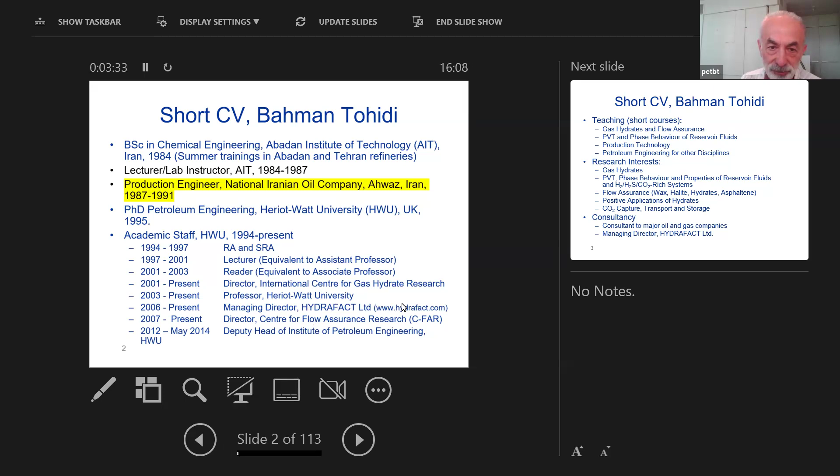And then I formed HYDRAFACT Limited in 2006. The area that I work in is gas hydrate, flow assurance, PVT and phase behavior, production technology, petroleum engineering for other disciplines, gas hydrate, PVT, flow assurance, positive application.

So that's my thing that I work on.

And can you recognize me when I was a production engineer? That's me, that's me, let's see. Okay, that's me working for Schlumberger - no, not for Iran, for the oil industry in Iran. And Schlumberger was giving us some services.

Here, I can cover a lot of area, but it really depends what you want, you know. Some area that I know is necessary, some area that you know is necessary. So I very much hope that we work together to make a very useful course.

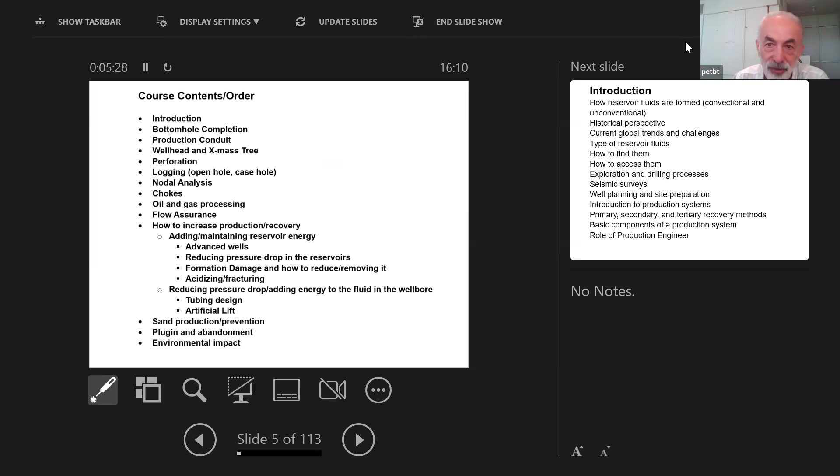For the parents, in introduction, I will cover how reservoir fluids are formed, where the oil industry started, current trends and challenges, type of reservoir fluid - when we say gas, we say wet gas, dry gas, gas condensate, oil, volatile oil - and how we find them.

And then how we get access to them, and then drilling processes. Because drilling is a very expensive process, so we need to have a good chance of achieving the oil or gas.

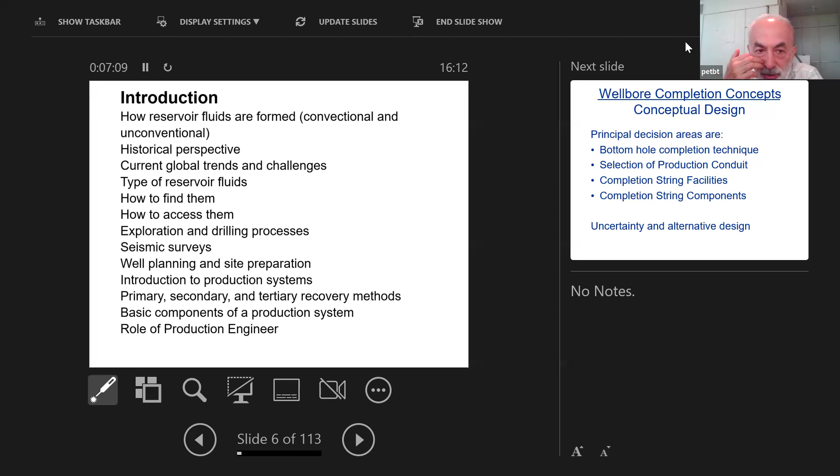Seismic survey, well planning and site preparation, and then production system - when we call it primary, secondary, and tertiary - and then basic components of a production system, and what is the role of a production engineer? What we expect from a production engineer.

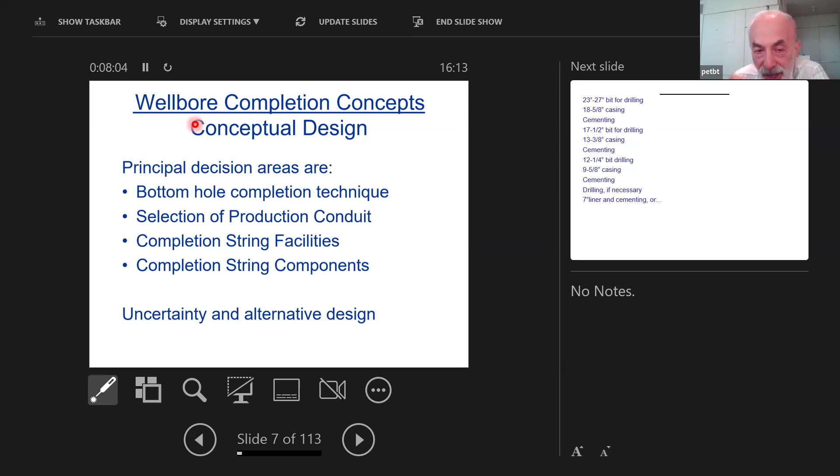Something that recently became very popular is unconventional reservoirs - what are they? And then the well completion concept: when you drill the well, you need to decide how to complete the bottom hole, how you bring it to surface, which component you want to have, which facility you need to have, and which component you use to achieve that purpose.

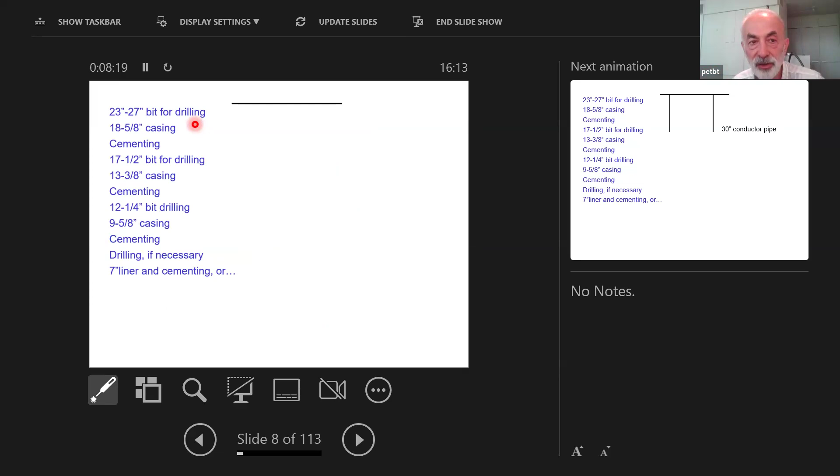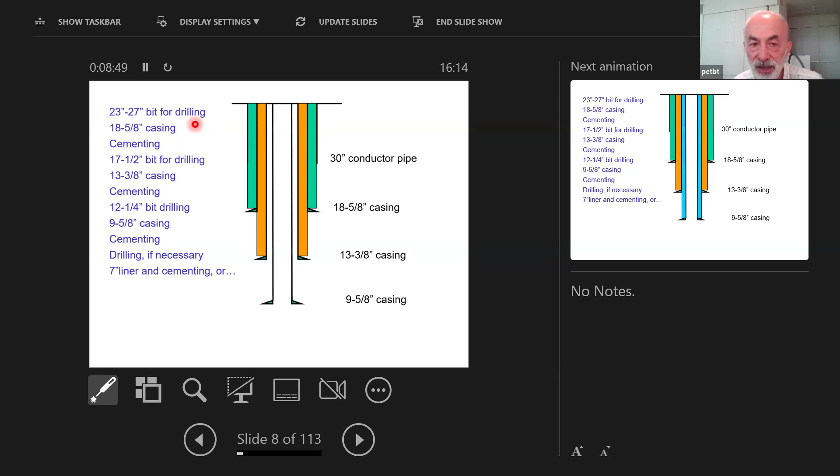Once you find a good chance of drilling and finding a reservoir, you need to drill. In drilling, you have a conductor pipe, then you do an 18-5/8 casing, cemented - this is general, typical - then 13-3/8, then casing, and then 9-5/8 casing, and then cemented. And then most of the time we have a 7-inch liner. Obviously, different countries and the depths of the reservoir, they can be different.

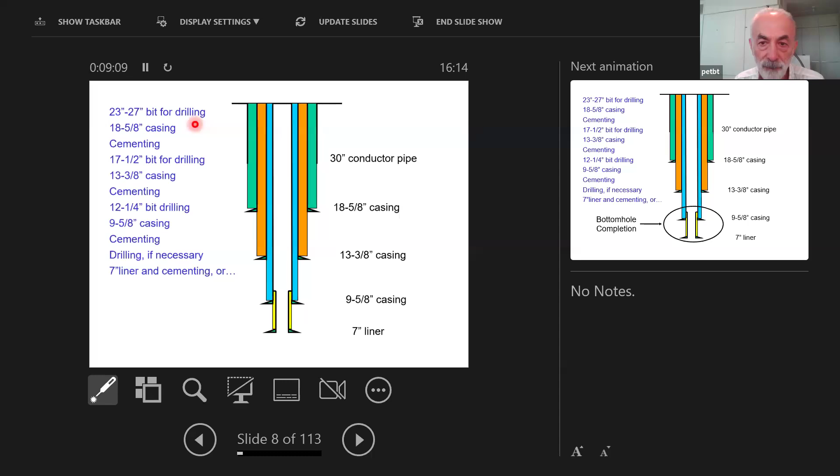What we call bottom hole completion is what is at the bottom here - bottom hole completion. And that can normally be open hole, pre-slotted casing, but more conventional is cemented and perforated. And there are different versions of this - this can be horizontal, can be multilateral. Here you can have expandable screen, different techniques.

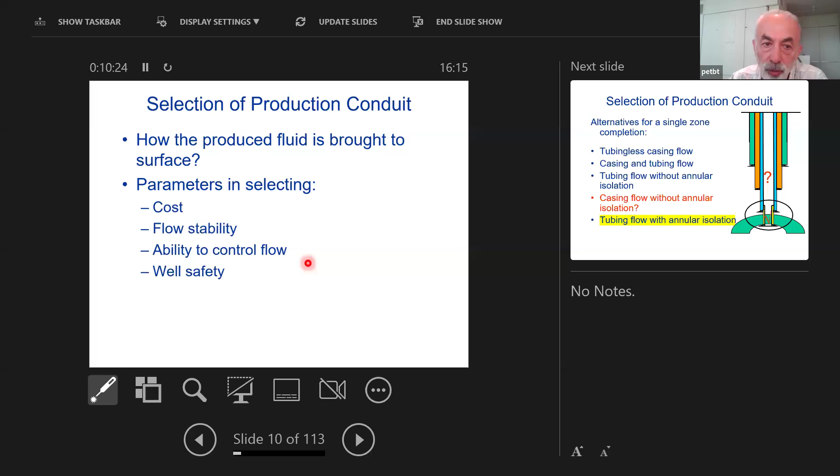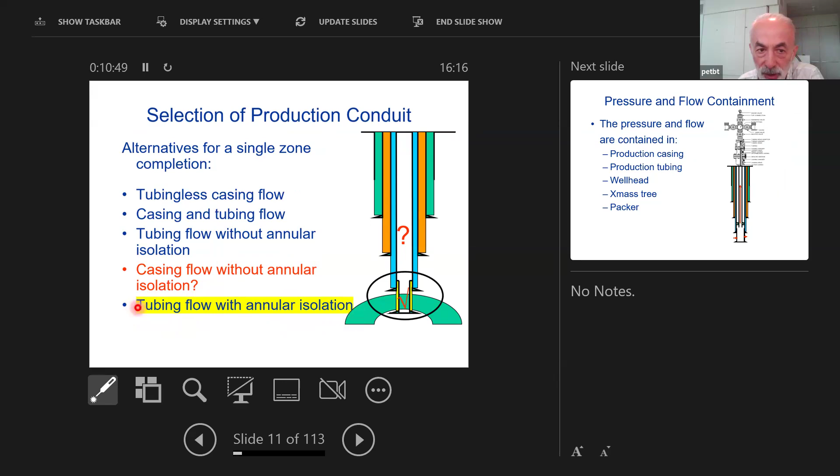And the next point is how you bring the fluid to surface. That depends on the cost, flow stability, control flow, and well safety. And that is the production conduit, how we bring the oil or gas to surface. There are various techniques, but this is the most popular one - tubing flow with annular isolation.

So this is tubing, flow in the tubing, and here the packer to protect the casing. That is the most popular completion.

And then the minimum requirement is that you have a perforation, you have a tubing, annulus isolation - that's the packer - and then a sliding side door, because you need communication between tubing and annulus if necessary, to open it. And then a subsurface safety valve, and then surface isolation. So this is the minimum requirement.

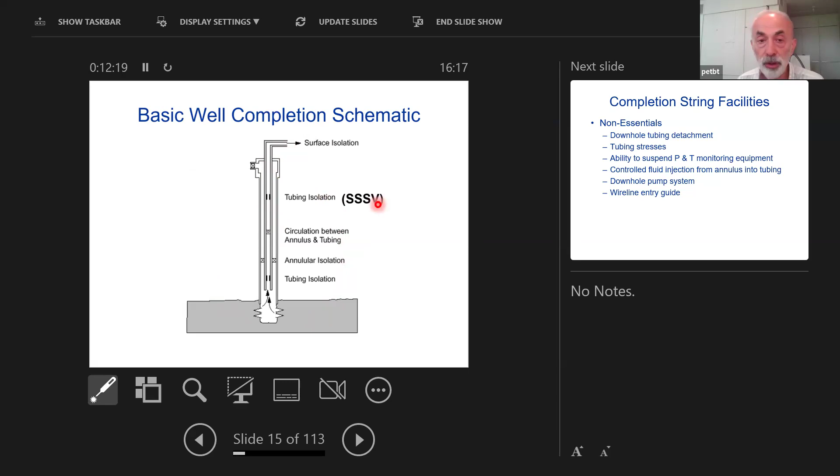But it can have a lot more different components. You can have downhole tubing detachment, tubing stresses - because oil from the reservoir is warm, so that will increase the length of tubing. If you are injecting water from surface, that makes the tubing cold and makes it smaller. Then you should be able to manage these stresses. And then the ability to suspend pressure and temperature equipment, control fluid injection, downhole pump system, and wireline entry guide.

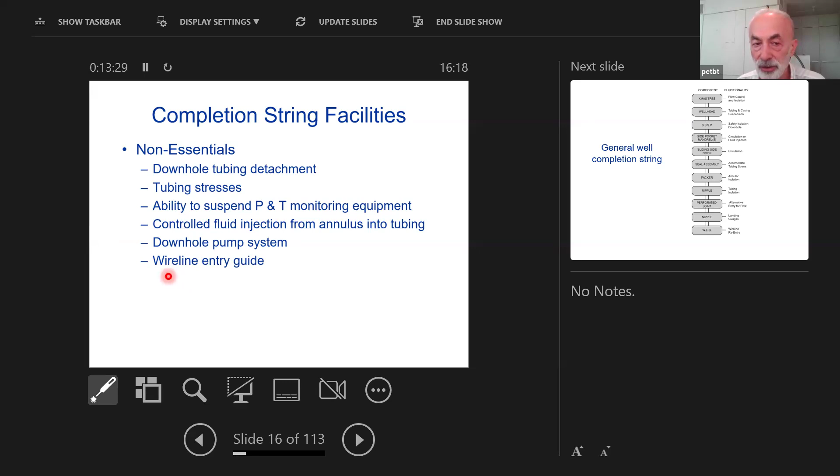So that is the minimum, basically conventional, general setup. So from the bottom here: wireline entry guide, nipple, perforated joint, nipple, packer, seal assembly, sliding side door, and side pocket mandrel, subsurface safety valve, wellhead, and Christmas tree. We obviously explain this depending on your area of interest - we can explain a lot more during the course.

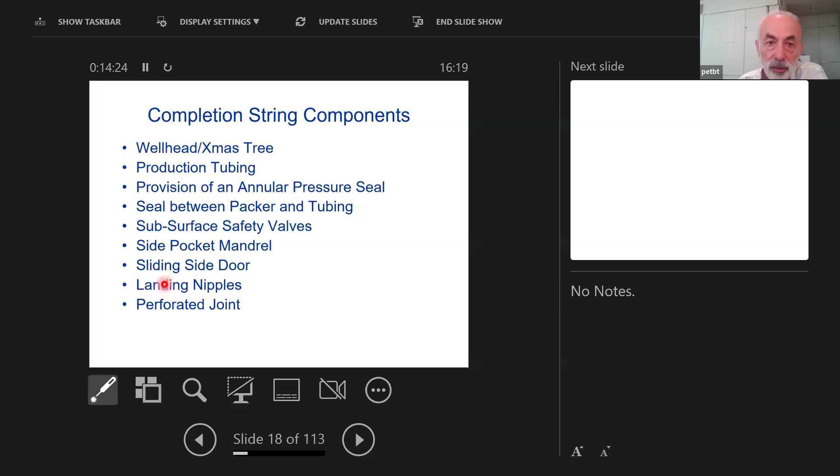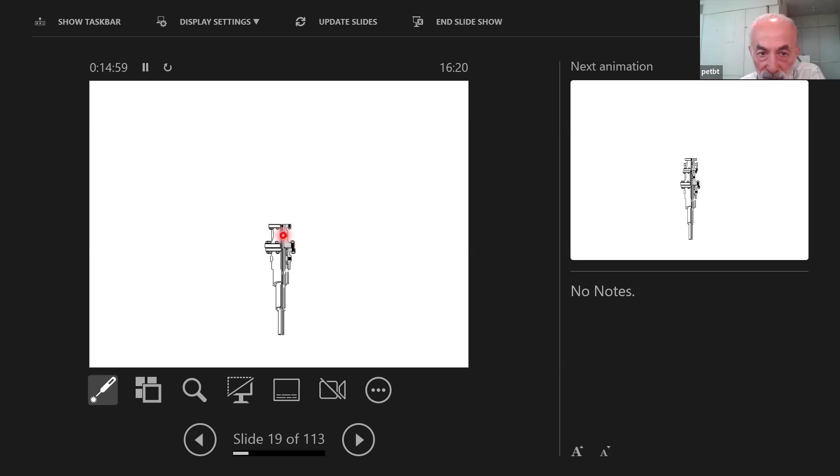So these are the completion string components. Here you can see that when you drill, you put the first casing, and then drill the next one, put the second casing, and then casing head, yeah, and drill the next casing, and then tubing head, you see that?

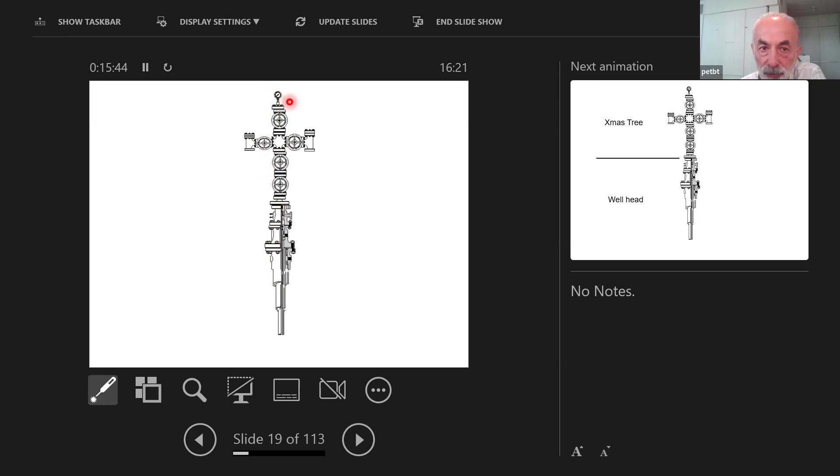And then here is bottom safety valve, bottom master valve, top master valve, injection valve and production valve, and another valve for vertical access to the well and reservoir, and then the top pressure gauge. This is the wellhead, up to here. This is called Christmas tree.

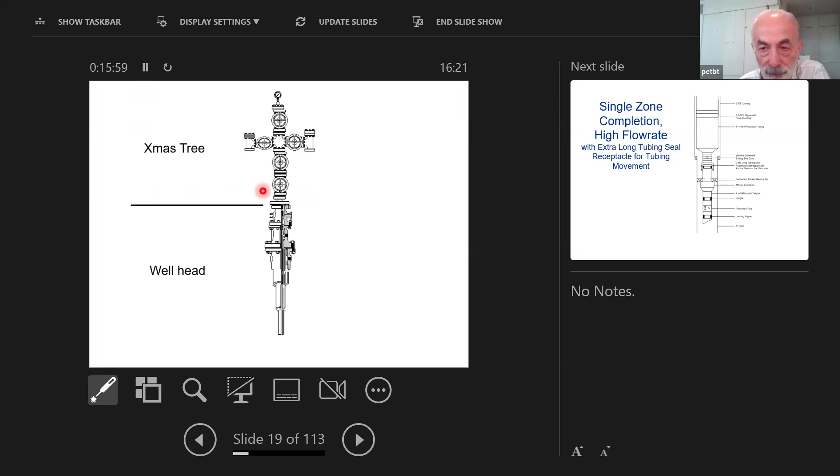This is another one with side pocket mandrel for injection of gas to help the oil. This is for an oil reservoir, to help the oil to produce.

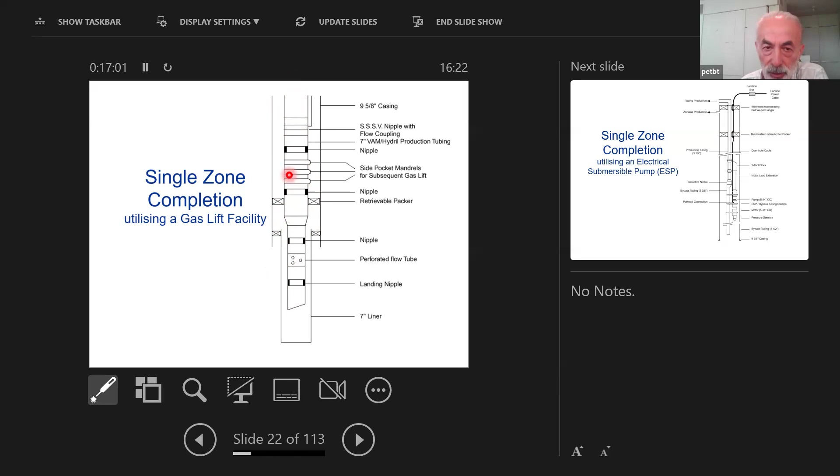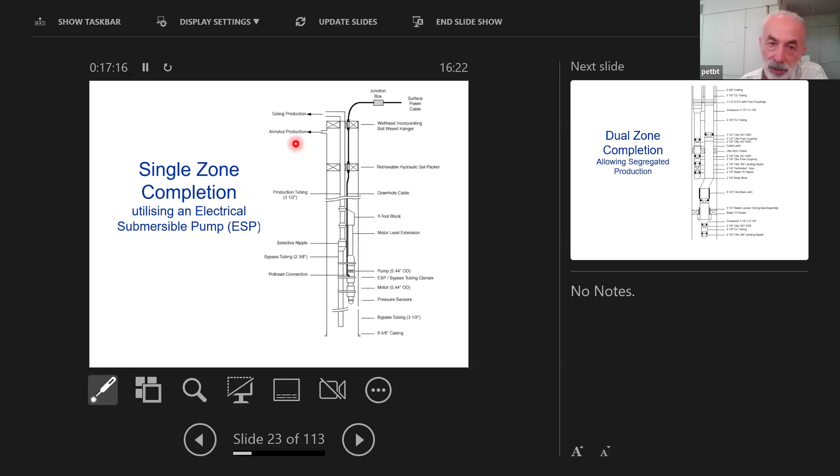We discuss all these components in detail. Or we need to have a pump, a downhole pump. That's another possibility, which is becoming more popular.

And then is multi-zone. So we are producing from the top zone, from this, and we produce from the bottom zone, from here. Why do we do that? Because of economy. And this is, as I mentioned, a compact wellhead, and this is the Christmas tree.

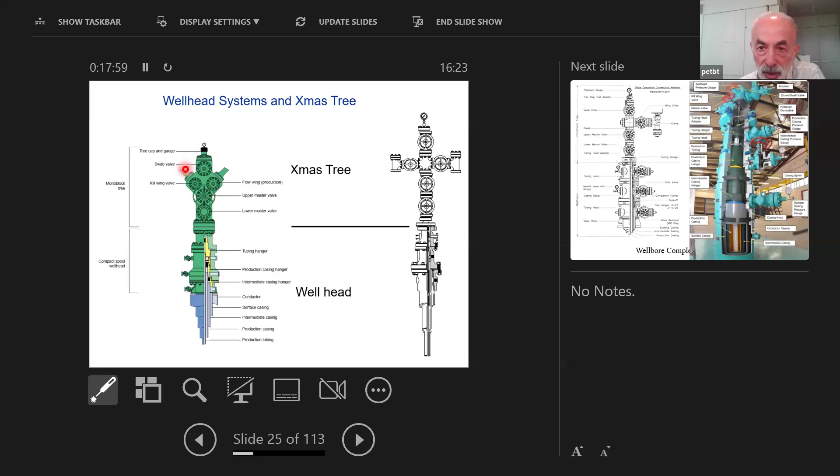And it can be very complicated offshore. So we discuss all of these. If you are interested, we can discuss it.

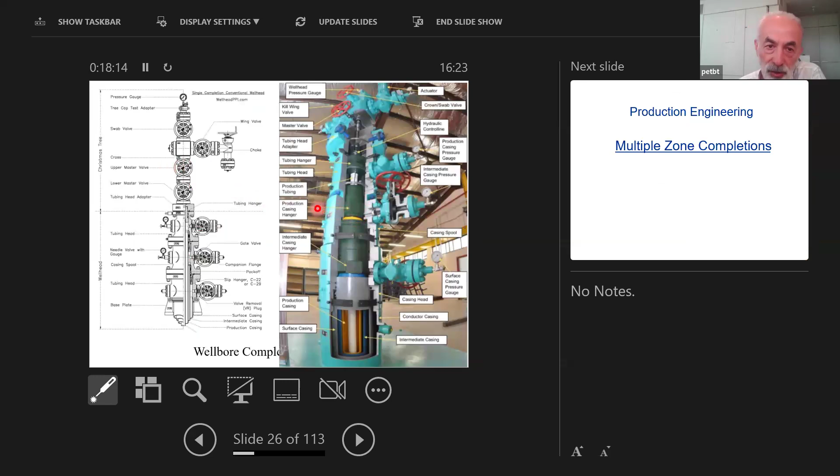And in multi-zone production, we can have commingled flow, segregated flow, or alternative flow. So we have more than one area or depth of production. We can mix them together, when and why we mix them, and segregate them in the design of the well, and alternative, how we produce.

For example, here is a dual zone, segregated zone. You see that the bottom zone produces from this tubing, and the top zone from this tubing.

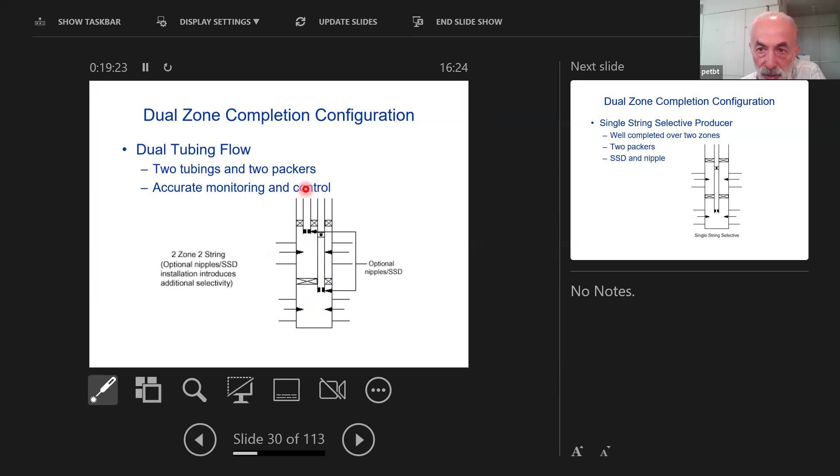This is alternative zone. We produce from this zone for a while through the closed side pocket mandrel, the sliding side door, and then put a plug here. After 6 months, open the sliding side door, and we produce from this zone.

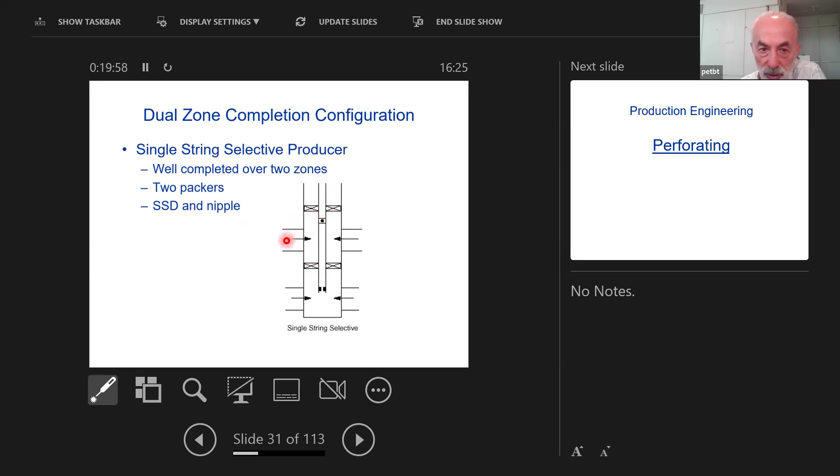Perforation is the communication between well and reservoir. There are various techniques we can do that. And they are decided on shot density, number of shots per unit length, and shot phasing, at what angle they are.

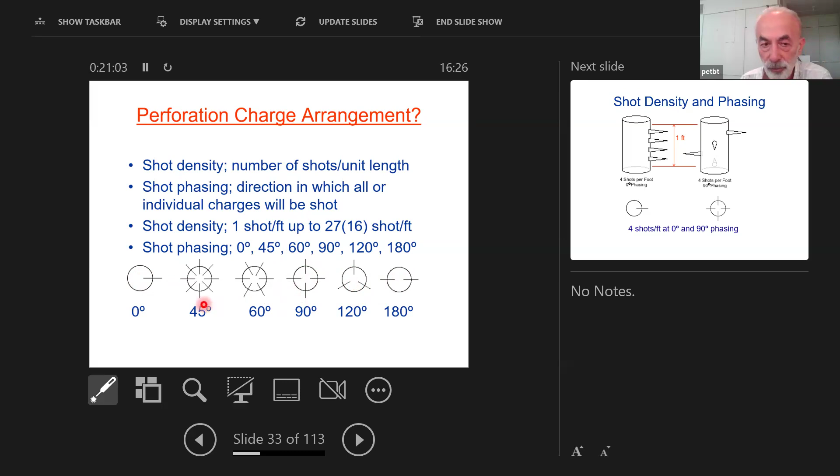This is shot density of 4 shots. Here is at 0 degrees. You see that all the shots are in one direction.

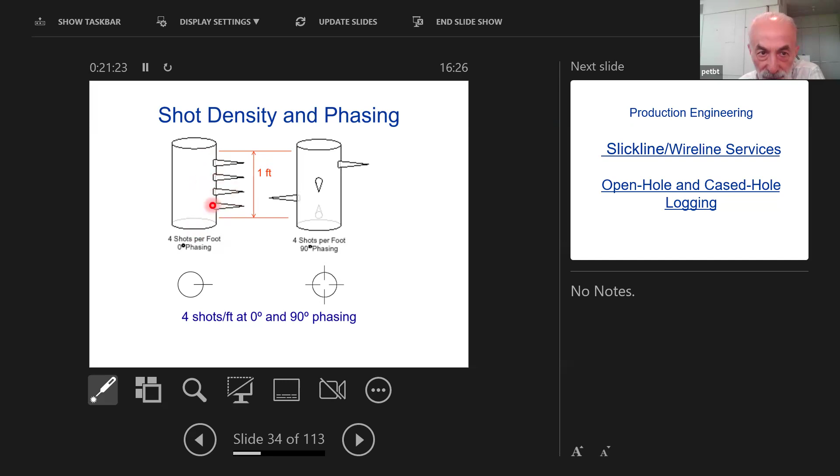Or here is 90 degrees. One shot here, one shot here, one shot here, one shot over here. We discuss what is the benefit of this one, what is the benefit of this one, or other area, other possibility.

For example, one area on a horizontal well: if you have a sandy reservoir, you inject all the shots vertically, because that forms an arch that prevents sand production.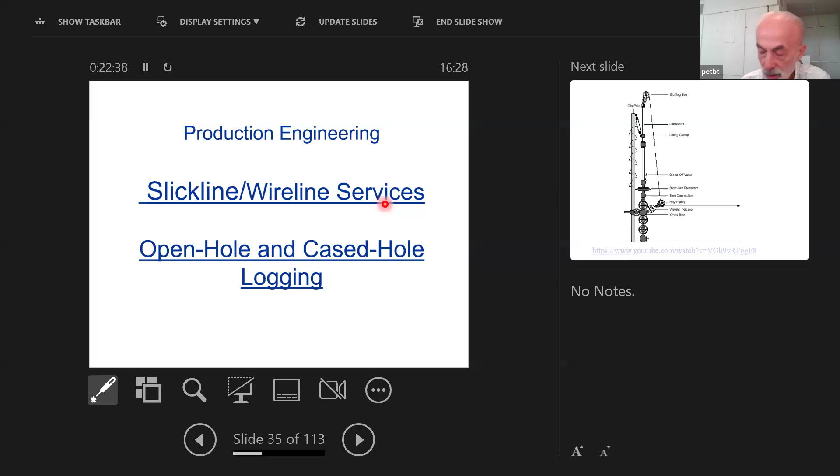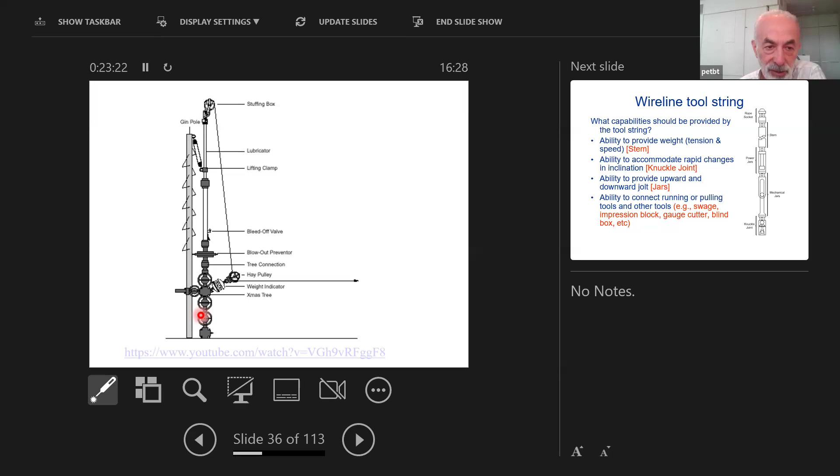And this is basically, here there is a truck, and this is the wire. This is a stuffing box, and then this is what is called the lubricator. This is the safety valve, and it's connected to the vertical well. It is a very clever design, and I learned a lot from them.

And while I'm on the tool string, we need to have the ability to lower it into the well. We need a stem that is a heavy weight metal, and then a knuckle joint. This is the knuckle joint. Jars - these are jars, power jar and mechanical jar.

And then the ability of different components of the wireline here. And here is the rope socket that connects all of this to a rope.

And then different equipment can be added to the bottom here, to do different measurements: gauge cutter, impression tool, blind box, tubing perforator, running and pulling tools, swage, wireline spear, bailer, positioning tool.

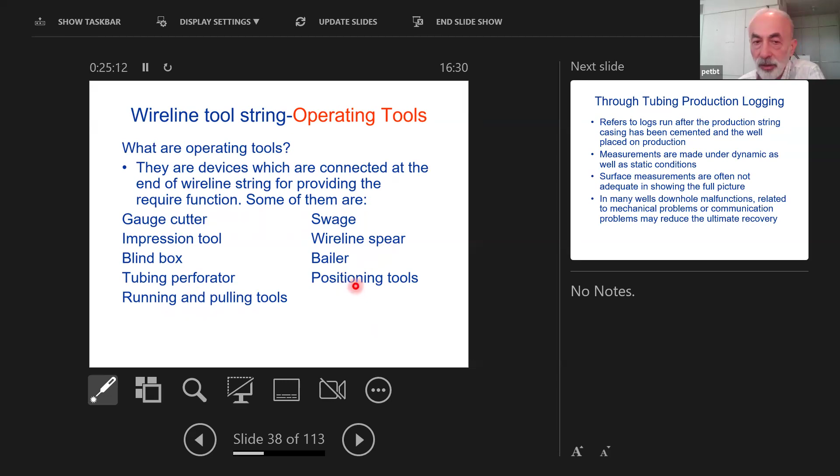There are a lot of equipment that we can add.

The most interesting one is through-tubing production logging, because like a doctor - you get some sickness, you need to do examination, you need to go to the doctor - the wireline provides that information. It's like the doctor telling you to go do this test or this laboratory.

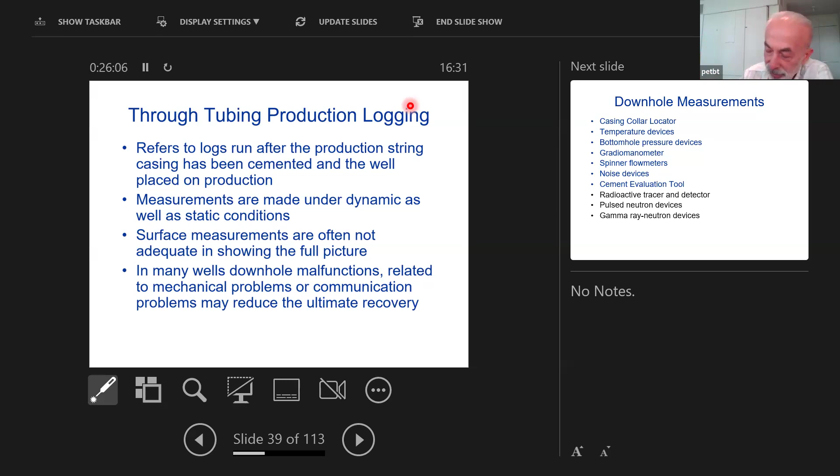And these are some of the equipment: temperature devices, bottom hole pressure devices, densitometer, flow meter, noise devices, cement evaluation, radioactive tracer and detector, pulsed neutron, and gamma ray.

So there are various devices that we can send from the top of the well to gather information. So here, a typical casing collar locator.

Thermometer, pressure - this shows what is the available diameter available.

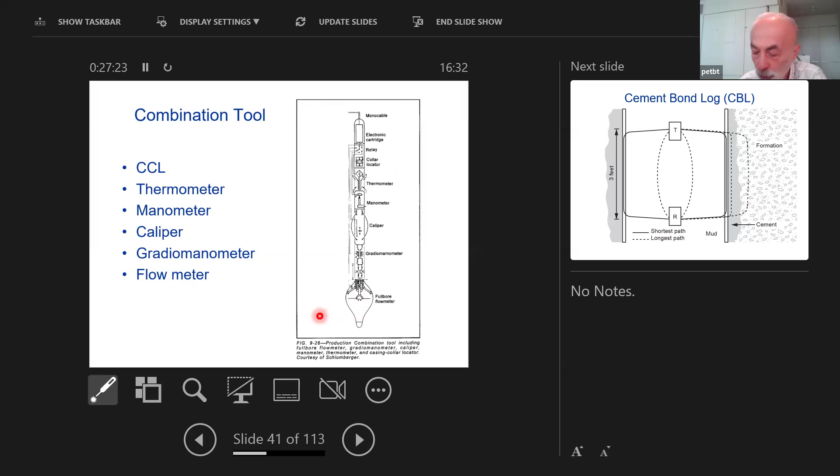In a way, densitometer, and at the bottom is flow rate measurement. This is like the cement bond log.

Cement is very important. Cement behind the casing determines the fate of that reservoir, that well. So it's very important. Unfortunately, it is ignored, and that causes a lot of safety issues.

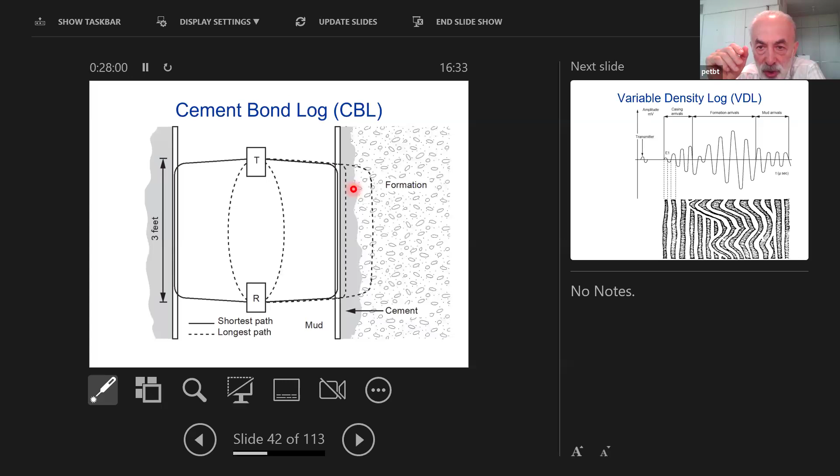From this cement log, we can see the quality of the cement. For example, here I can say good quality cement, yeah, and here is not very good. Here we don't have any cement - see that from the white section here. So we need to inject cement.

Now, then we discuss the basic theory of production from wells. The flow in the reservoir is radial flow. So initially, when we produce, pressure drops near the wellbore. With more production, the pressure in the well will be reduced and the pressure drop reaches the boundary of the reservoir.

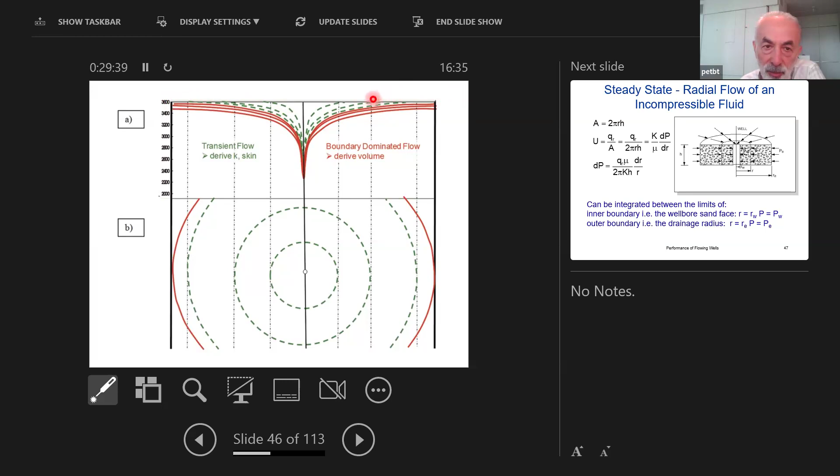And then based on this, we can develop an equation based on gas and oil production. We will discuss all of these in detail.

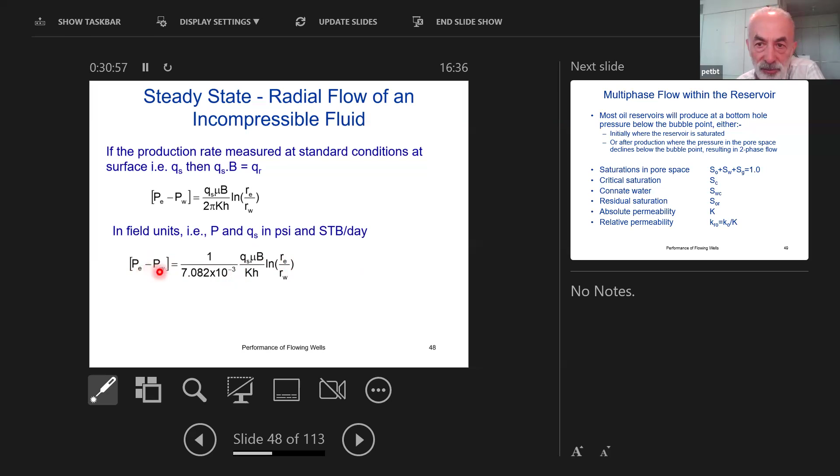So here, for oil production, this is Q, that is viscosity, formation volume factor, this is permeability, this is height of perforation, and this is the radius of the well, this is the boundary. You see that all of these are fixed. The production for a single phase, liquid phase, is pressure difference.

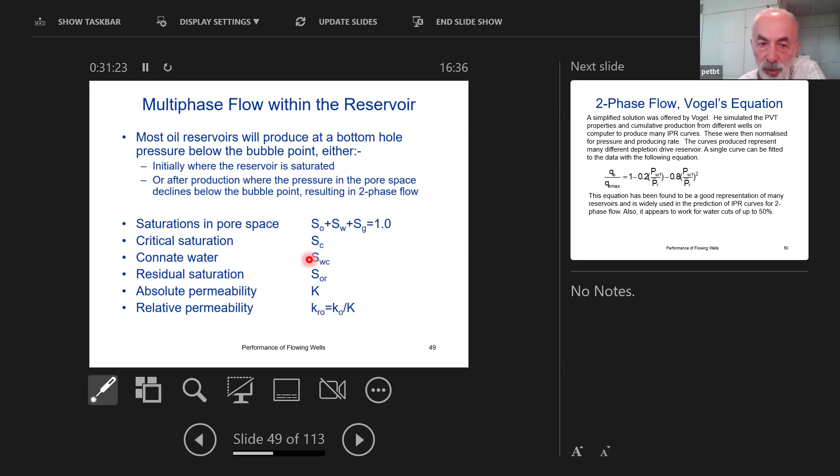But normally we don't have this, we have one oil phase. Here we have multi-phase flow. Therefore it is more complicated. So we need to work with a more complicated equation.

For two-phase flow, there are various options, but the most popular one is the Vogel equation, which follows this equation. We discuss this as the most popular equation, with some examples of how it works.

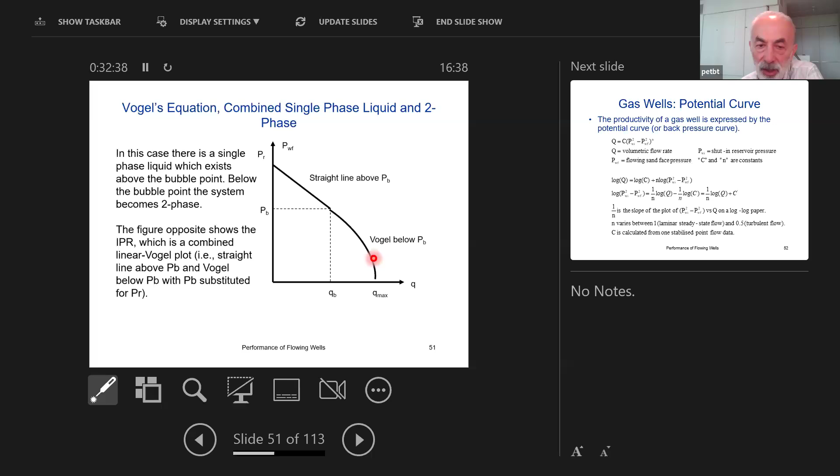If the reservoir is above saturation point, above saturation point is pressure difference, but here is Vogel below bubble point. And we need to build this equation if the reservoir is above its boundary, above bubble point, and then near the boundary it is two-phase. Gas reservoir is different.

Gas reservoir is pressure to the power of 2, for the boundary and flow at a constant, and the power here.

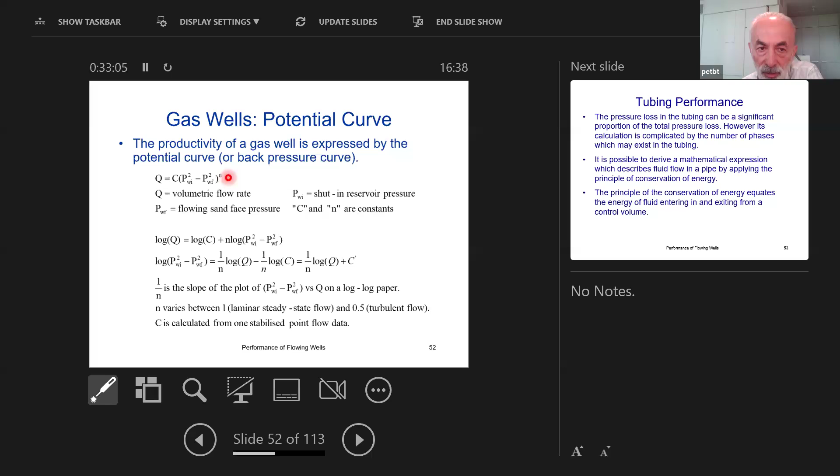So now with this equation, that is single phase oil, single phase gas, multi-phase oil and gas, we calculate pressure drop from reservoir to well.

From wellbore is tubing production. Now tubing is friction if it is single phase. We can also calculate this, this is pressure drop.

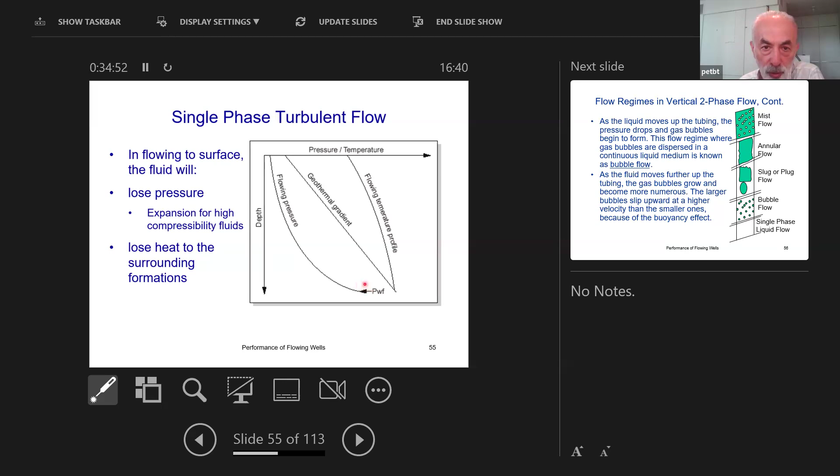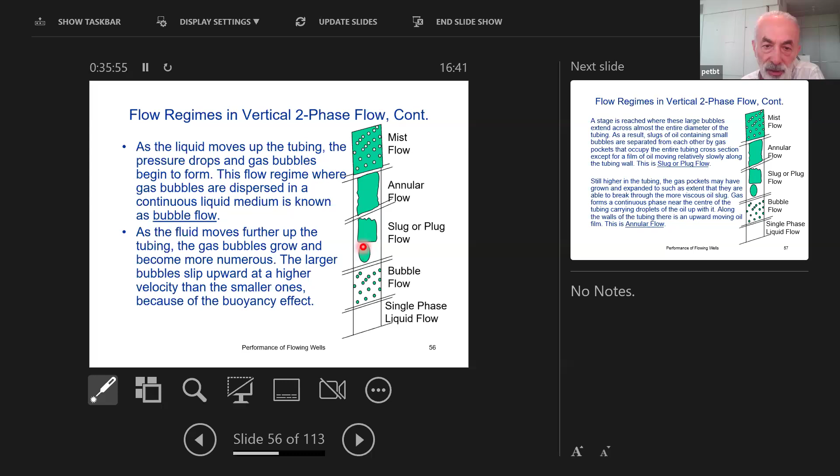So therefore, that is a very sophisticated test, and an equation is developed to model this.

In general, delta P is delta P elevation due to the depth of the well, friction, which follows the Moody diagram, and then delta P because of acceleration.

One thing that a lot of engineers do not take into account is holdup. We will discuss holdup, it is very important, because it has a very important effect on pressure drop calculation and on when to take a sample. Because sampling on the surface is much cheaper than bottom hole, although in some systems we cannot.

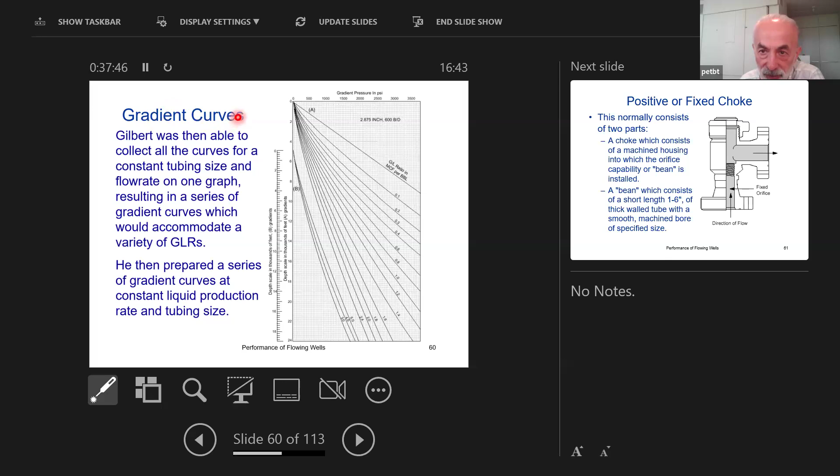Another problem is the choke. What is the role of choke? A lot of people do not understand what the role of choke is. They say, why put such a strong resistance in the flow? We will discuss it a lot. It is very important to understand when the flow is choked, when it is in restriction.

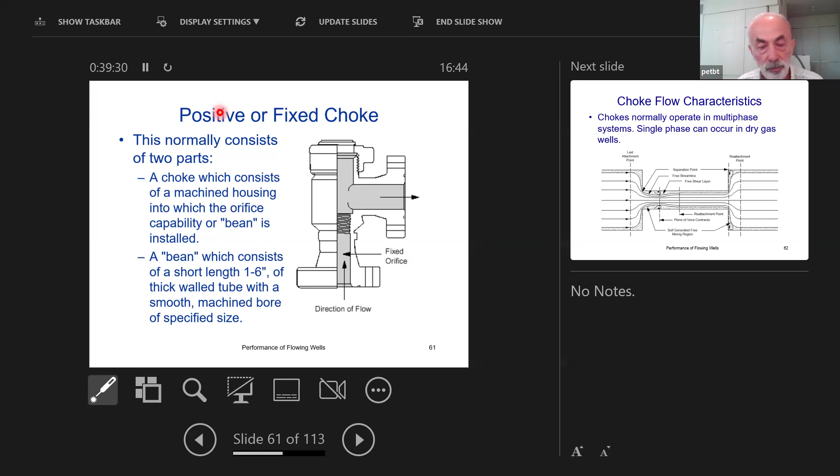What is the maximum flow of a fluid or two-phase flow across a choke? Choke basically separates production from reservoir. How can we accumulate several wells into one separator without a choke? We cannot produce several wells into one separator or one header without a choke, because some of them are stronger, they have higher pressure, and we would not let production from the others.

So the choke, the importance of choke, we will discuss. This is vena contracta... this is the process of flow across a choke. For a gas well, the pressure downstream of a choke should be at most half of the upstream pressure. We will discuss why.

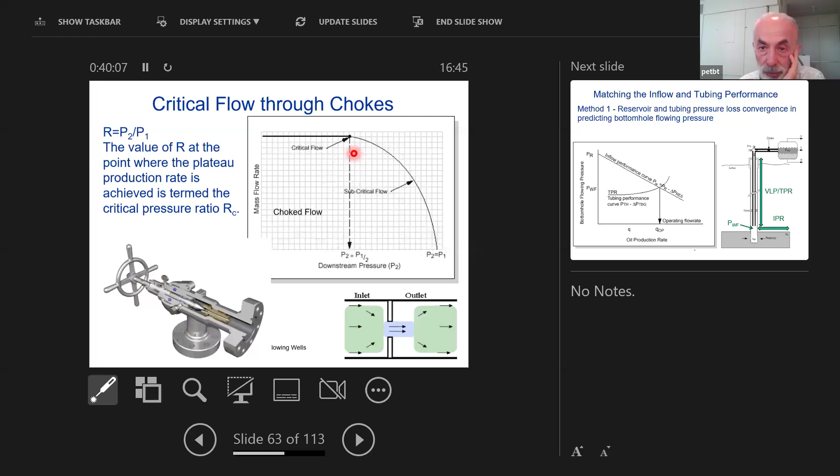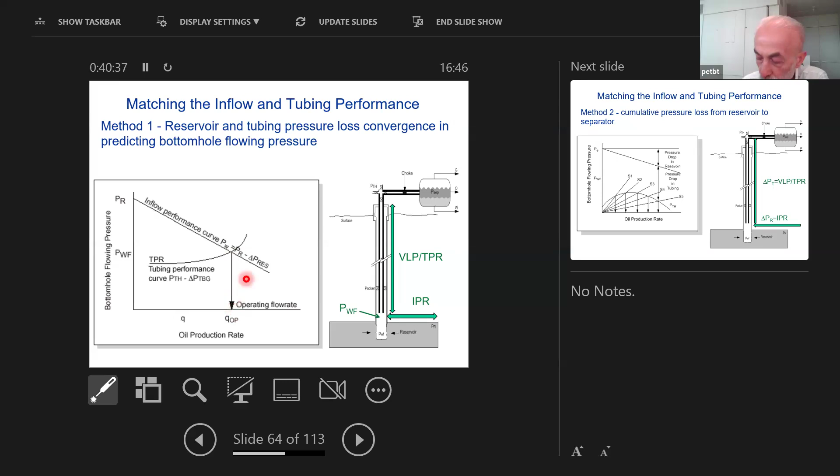And then from nodal analysis, we can say how much this well will produce. You see, this is flow from the reservoir, this is flow through tubing, that is the point of maximum production. Or depending on choke size, we can decide how much we produce.

Another important topic is oil and gas processing. Oil and gas, when they come to a choke, there was one well here, one well here, one well here, one well here, one here. Each of them can only come to one separator with a choke. Without a choke, they cannot produce. And then in the separator, we separate gas, oil, and water.

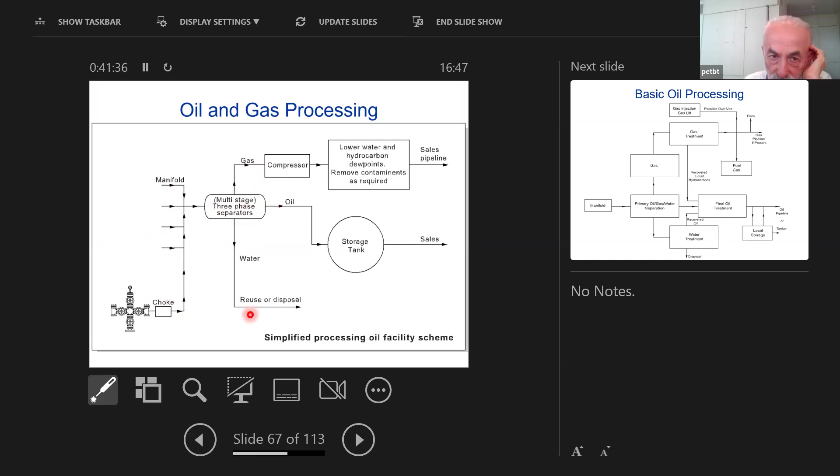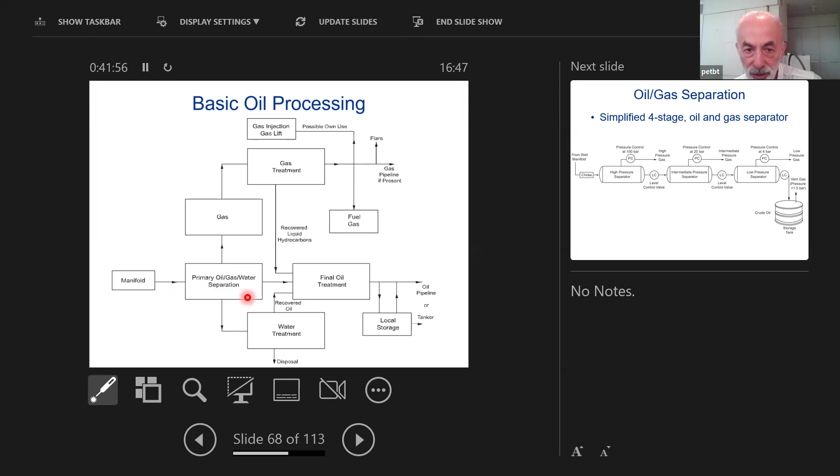Because oil needs to be stable at pipeline condition, for a manifold we have a primary oil gas water separator. Here at the oil reservoir, we had the field in charge of unit 2 of Ahvaz, where we had 4 separators.

This is for maximum oil production, but you cannot do this offshore, because space and weight are limitations. So normal offshore separation is 2 stage, but onshore you can have more operations, and this is a full production unit.

You need high pressure, medium pressure, low pressure, and then water; oil separated from water here, or gas recovery, any oil recovered from the gas phase comes back to the oil. The aim is to maximize the amount of liquid. That's the aim.

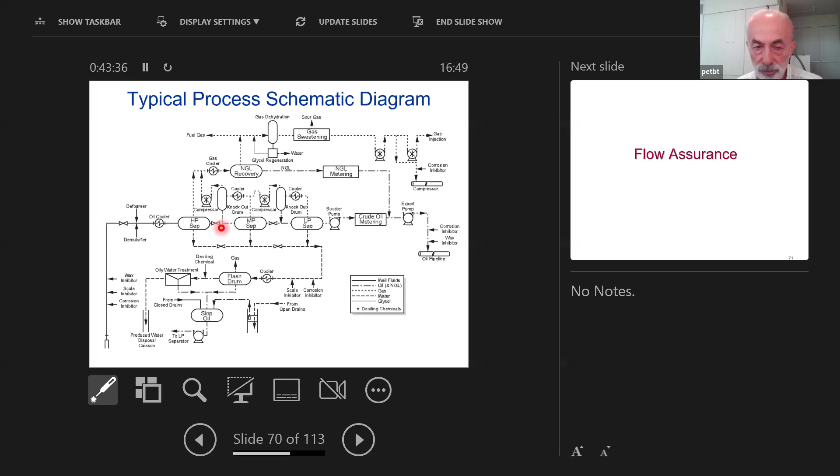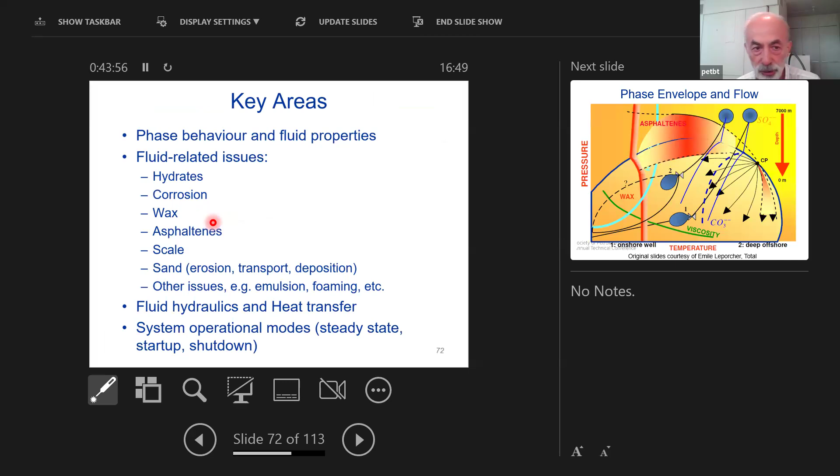Flow assurance is another key area, including hydrate, corrosion, wax, asphaltene, scale, sand, and other issues like emulsion. We discussed these and how we design for them.

For example, here is the wax phase boundary, this is the hydrate phase boundary, this is the asphaltene phase boundary. This is onshore, this is offshore. So you need to have a phase envelope.

That is the importance of PVT - we need to have the phase envelope. This is the path the reservoir fluid is taking, but you can change this. You need this information, plus hydrate phase boundary, wax, asphaltene data, to choose which path.

To choose, and in future what will happen - in future you can see that the pressure will drop, so you pass this way. This is different scale calculation, so you need to have all this information.

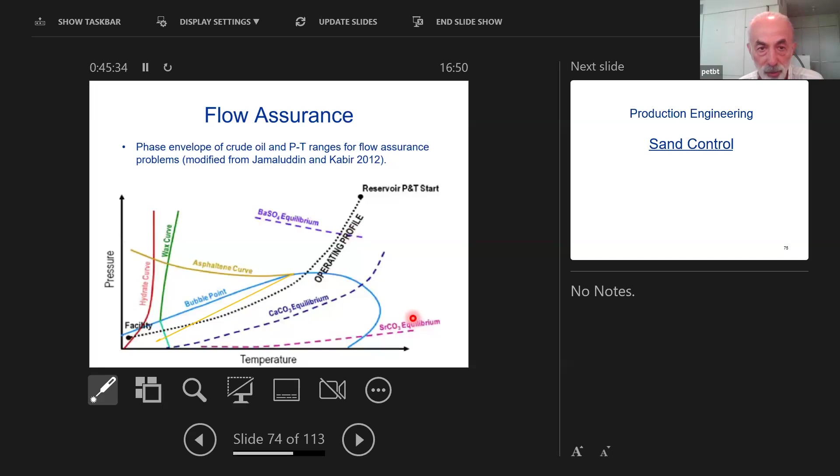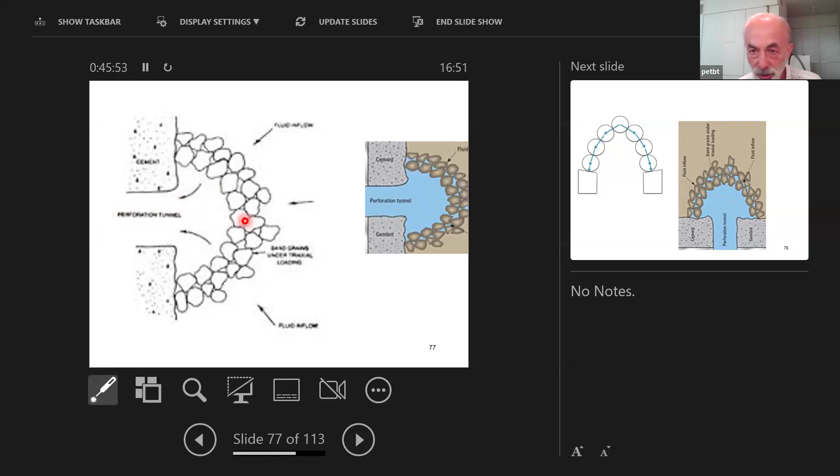Sand control: sand can cause serious damage. Here I was talking about horizontal perforation or vertical perforation. In a horizontal well, you can have perforation upward and they form an arch, preventing sand production.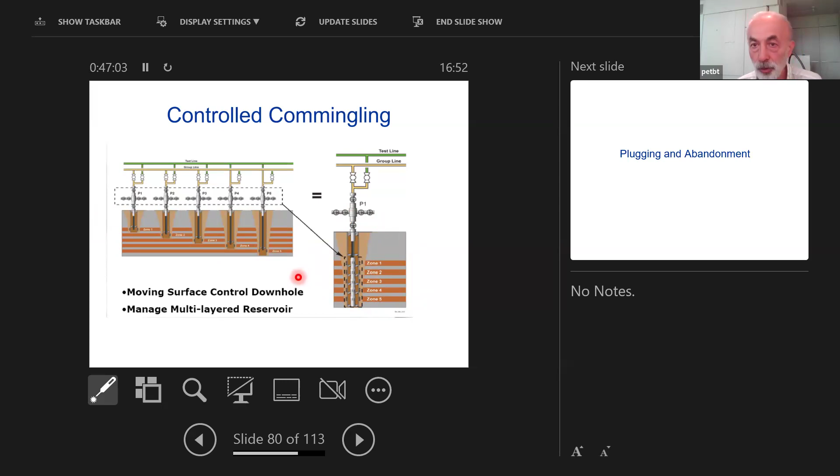Plugging and abandonment - after a while of production, we have to plug and leave the oil reservoir well.

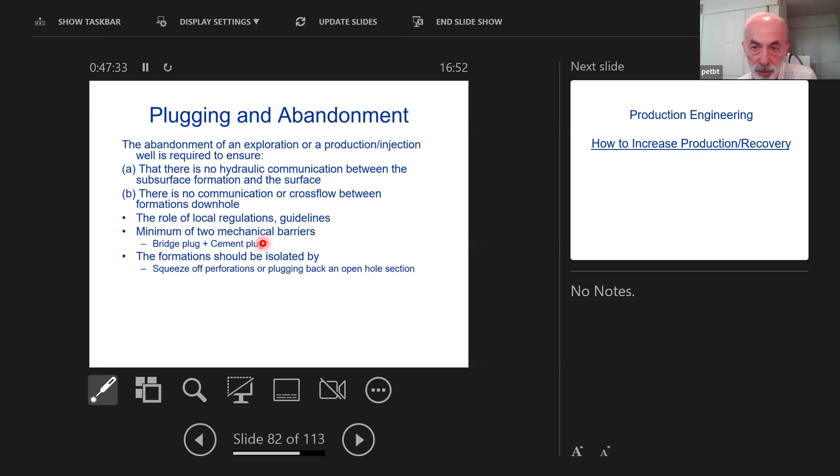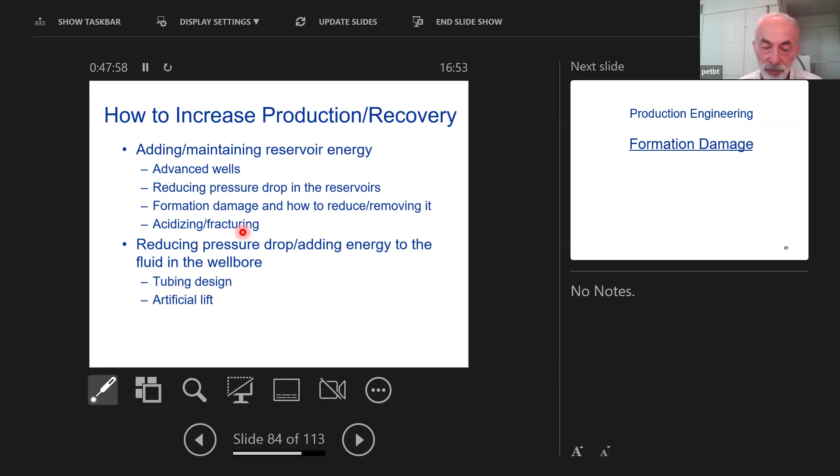Then there are different techniques to increase production recovery, which we also discussed: advanced wells, reducing pressure drop, wellbore and formation damage, acidizing and fracturing, tubing design, artificial lift. There are various options there.

Formation damage is very important, especially near the wellbore, because of increased gas saturation, reduced permeability to oil, increased oil viscosity, and increased volume flow rate, because gas has a lot more volume than oil.

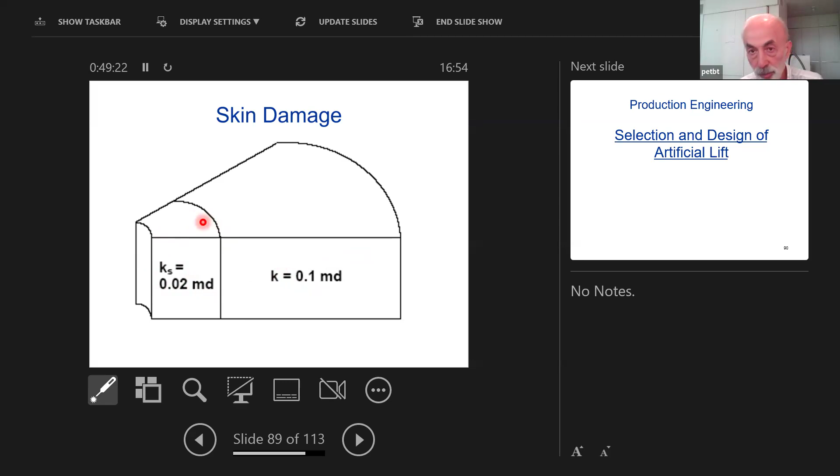Acidizing is very important. For example, normally near the wellbore, because of mud or other problems, permeability is lower than in the main body of the reservoir. We can do acidizing or fracturing to solve this problem, but it needs proper modeling and proper study.

Artificial lift - we discuss artificial lift, how it's important, and how to choose which one to use.

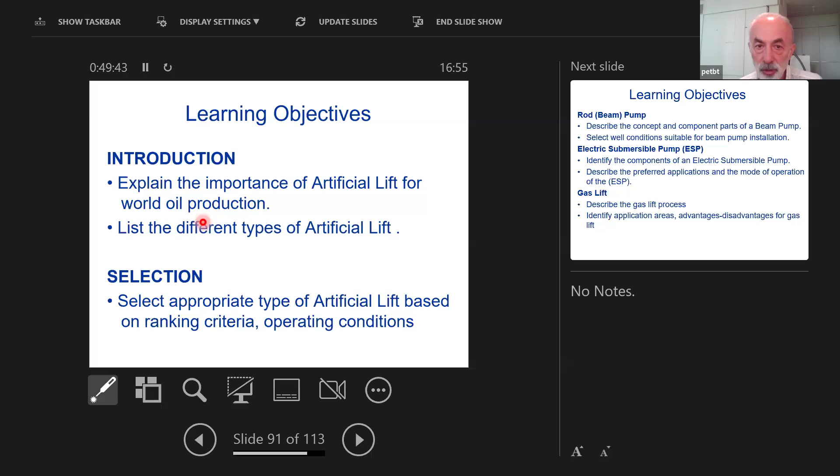Rod pumps, electrical submersible pumps, and gas lift - artificial lift basically provides extra energy to the oil. It can be with an electrical submersible pump or gas lift; these are the most popular ones, but there are other techniques as well.

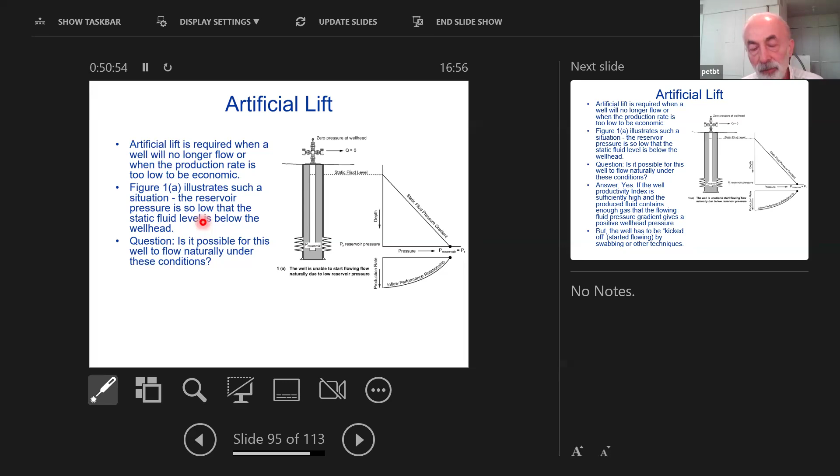I was involved in a reservoir in Oman where they were using steam, and the artificial lift they were using was producing a lot of sand. We managed to change the artificial lift and achieve more oil production with less damage to the reservoir.

Basically, if you have a pump, the level of oil comes up to here, so it doesn't reach the surface. With the pump, we increase pressure and bring it to the surface with positive pressure, producing more oil. In the beginning you don't have any oil, so we discuss how they are designed and operated.

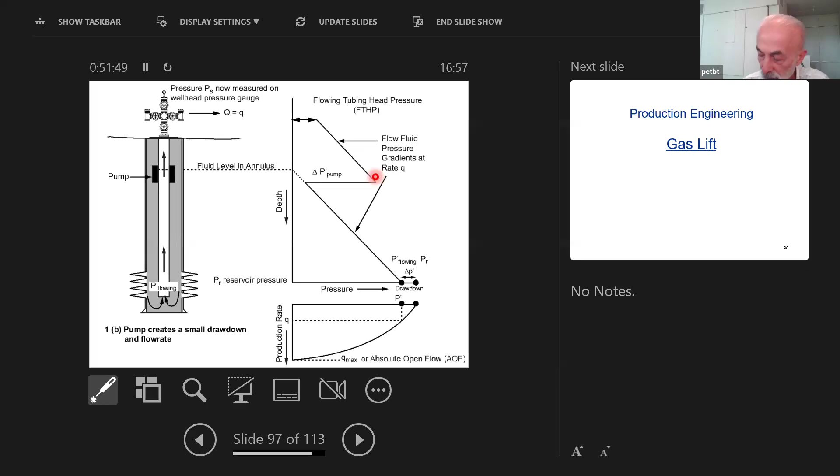Another artificial lift is gas lift, which we also discuss. Basically, in gas lift you have several gas offloading valves - these are valves - then you decide one valve as the operating valve. Normally, the lower one is better.

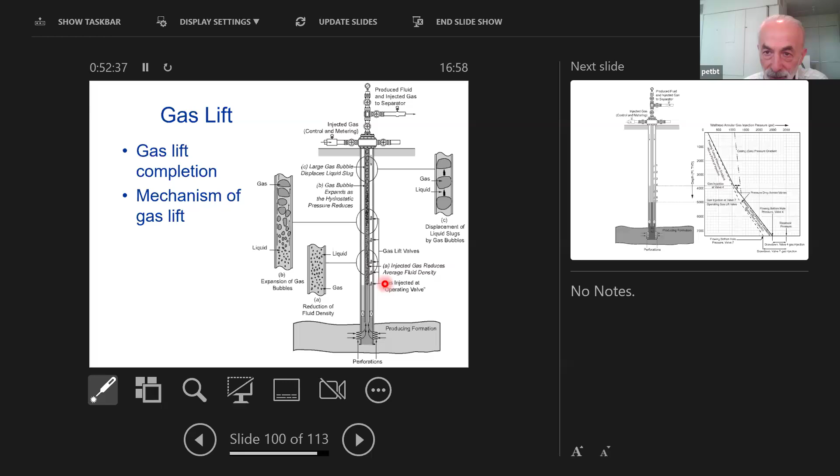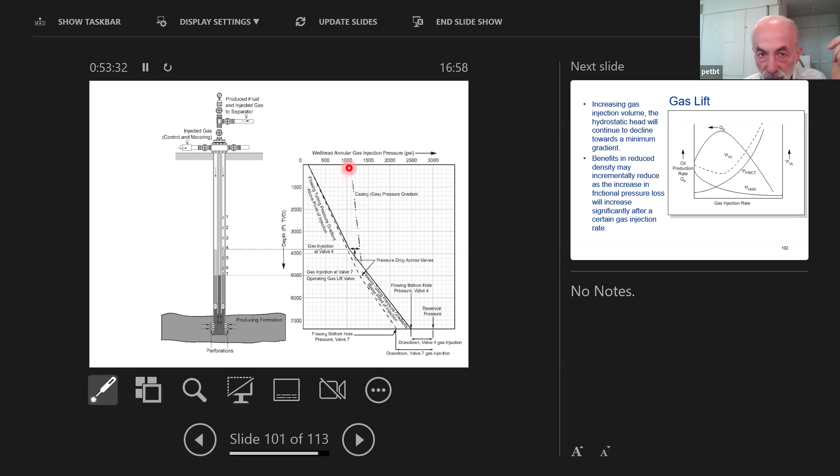Because with gas lift you inject gas that changes the pressure drop, since the density of the oil is reduced. Pressure drop due to density equals density multiplied by the height of the oil. So by changing the density, instead of having a pressure of 1000, there's always an optimum gas lift rate.

Because the frictional pressure drop depends on volume, and the hydrostatic head depends on density, the total pressure is a combination of both. At low gas injection the pressure is high; as you increase gas, the hydrostatic head is reduced and total pressure drop reduces, but from a certain point the frictional pressure drop increases. So maximum production occurs at an optimum point.

So we can design the gas lift accordingly.

Environmental impact is very important and becoming more and more important. Obviously we want minimum damage to the environment, and we can evaluate environmental impact. There are other areas we can cover in addition to this, depending on your interests.

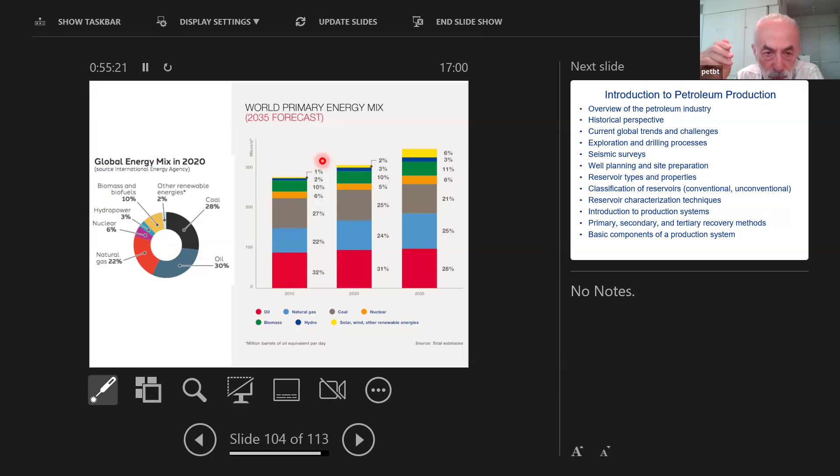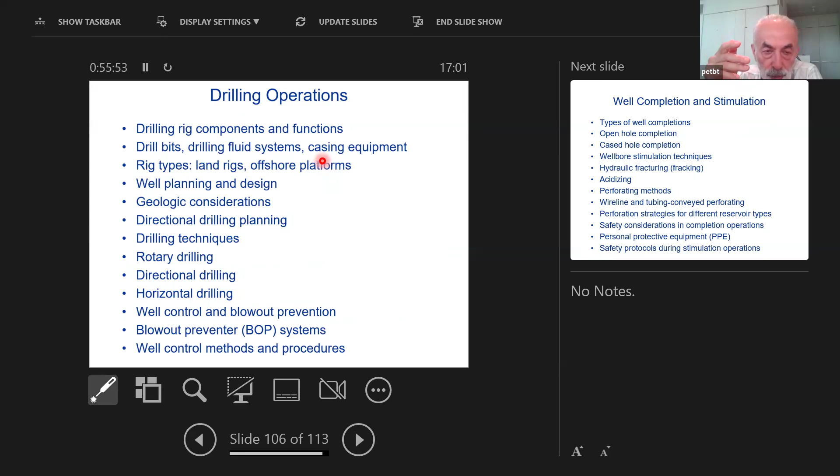These are the areas that we can cover - some of them we already covered, but it's up to you what you want to cover. We can give you a copy of this list of possible topics, and you can decide what you want us to cover.